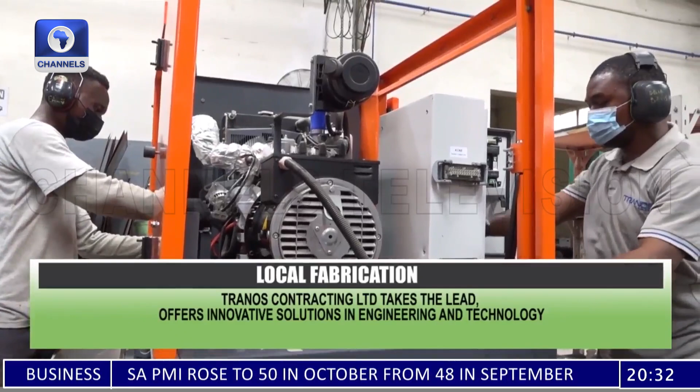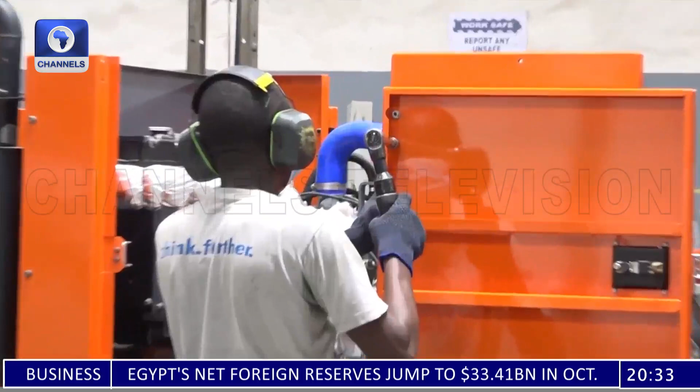Tranos is an engineering and manufacturing leader, adding value to lives through innovative solutions. Customer satisfaction is a key factor of the company's quality management system. From the deployment of high-precision CNC machines and the engagement of competent personnel to the institution of standard error-proof processes, Tranos guarantees the quality of its products and services with a quality management system certified to meet the requirements of the ISO 9001-2015 standard. Officer of Tranos takes our team down memory lane as he explains how the company started.

Tranos, we started about 14 years ago, and the whole idea of Tranos from the beginning was to try and set up an organization where people can come together and be able to provide value for customers. So the overriding idea was to be able to provide value to customers. Looking at staff strength, I think we probably started with 3 people, including myself, of course. So we had a small office then in VI. We started by trying to do things in terms of project management and some procurement that we're doing for oil and gas back then.

Now, we wanted to provide value. So what has driven us across time to date has been trying to find out where can we provide value? What value can we provide for customers? So by asking and answering that question, we've come up with ways, we've learned a lot of things, driven by knowledge, to invest in people, invest in equipment, invest in processes that can help us provide value. So that basically covers what has brought us to where we are today.

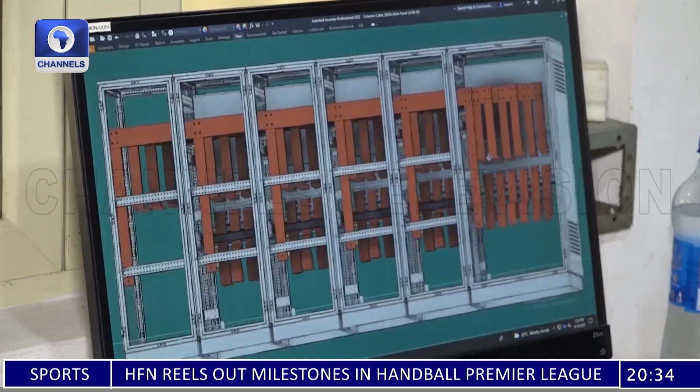In terms of staff strength, I think as of today we're about 170 people, because we do have, at times we go as up to 200, a little over 200, when we have installation jobs or repair to do for customers on site. So we are an engineering and manufacturing company.

And what that means is that we design things and we manufacture those things for customers. Those things will revolve around enclosures for various applications, both mechanical and electrical applications, power distribution equipment, that's electrical panels, electrical control panels, protection panels of various types. We make gaskets mainly for oil and gas and petrochemical applications. We make cable trays and ladders. We make warehouse racks for storages.

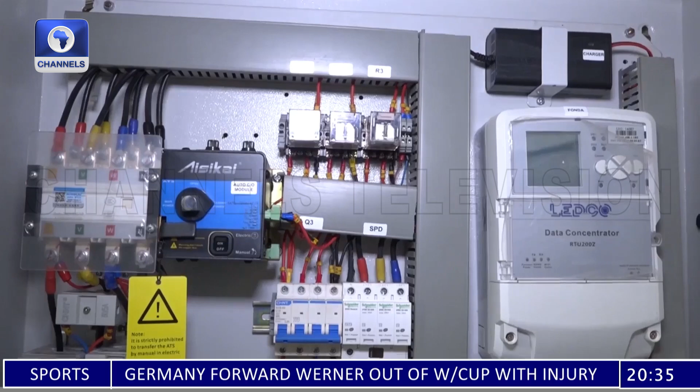Now, all our products are based on knowledge, meaning that you study what the customer needs, you study where the pain point is for the customer, and then you design a product to solve that problem. The drive was to solve problems. And when you're trying to solve problems in a sustainable manner, meaning that you want to be able to do this for years to come, you need to build a system. That system will involve people, it will involve processes, and it will involve a lot of knowledge.

So the drive was basically to provide value, and that drives everything we do. We want to provide value. That's the first thing that comes into our minds when we're trying to deal with things, when we are speaking to customers or when we're trying to respond to customers. Because someone walks in and says, oh, can you do this for me?

The thing he's trying to tell you is that I have a pain. So what we need to do is to find that pain and solve the problem. And that's basically it for us.

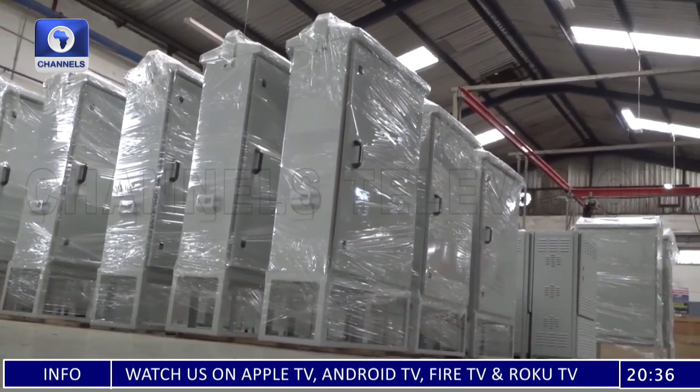It's been quite good. In fact, up until a few years ago, we never really used to do any marketing or sales. Practically all our sales were from word of mouth and referrals. And that shows you how customers view what we've done for them. So basically, you do something for one person, he speaks to another person about it. And in fact, we've had people come to us with problems that we hadn't solved for anyone else before.

And that's actually how our range of products have grown. We've grown on the basis of identifying pain points for customers, because someone comes and says, oh, I need a certain kind of enclosure. When you build it for him, you begin to realize that okay, there are many others like him who also need that solution. So that's how we've grown.

So looking at feedback from customers, they've been mostly positive. Of course, you have customers, some are not happy with price, some might have issues in the course of delivering to them, but at the end of the day, our focus is to make sure that the customer is satisfied fully when we are done with delivering our products or services. So we are very focused on that, because at the end of the day, we are here for the customers. So we try as much as possible to exceed the expectation of our customers, and based on that, we've been able to grow from there.

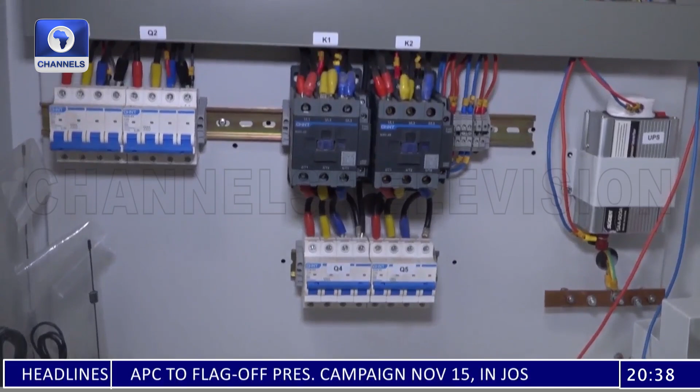So our products are first and foremost geared towards delivering power to customers. So we make various types of electrical panels and switch gear for customers, and that basically helps take power to where it's needed. We also manufacture cable trays and ladders, which is also used for power distribution for routing cables.

In addition to that, we have a range of gas generators, which we now manufacture first for the telecoms market, and those generators are designed for remote applications. So we have specifically designed gas generators that can work remotely with minimal intervention, and they run on LPG. LPG is your cooking gas, so you basically are using the same gas you used to cook to power your equipment.

And if you look at all that, that's why I said when you asked, I talked about power. Now, our enclosures are also used a lot for power, so we have customers that use our enclosures for generators, for protection and sound attenuation on generators. We have customers that use our enclosures for other power distribution. So you have a customer that wants to build his own panel, so he comes to us to buy his own enclosures. We make enclosures for meter boxes as well. So you know the meter in your house, it has to be protected in a particular well-designed enclosure. We make that as well.

So you will see that about roughly 80% of our products are geared towards power. Our gaskets are also used in the oil and gas industry, which is energy basically. And we also have the racks. Now, racks are more industrial. It's for storage, so I'll say industrial and commercial. But you will see that a lot of our products are designed to help one way or the other in either generating power or distributing.

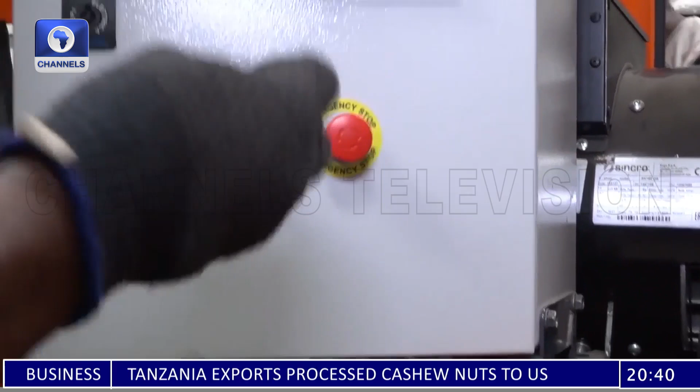The Nigerian power challenge is not a technology or a technical problem. It's a commercial problem. So it's similar to, years ago, we had NITEL, and there were issues with communicating. What changed wasn't a new technology really, per se. Yes, GSM was relatively new then, but that wasn't what changed. What changed was that the industry was commercialized such that it was able to attract enough investment to solve the problem. So similarly, in the power sector, what we have is there are no commercial incentives for a lot of investments to come in to change what we have.

So it's not really, if it was a technology issue, we can say, okay, we can come in. And yes, we are doing that in a way with the gas generators that we have, which easily replaces diesel generators and gives a better return on investment at the end of the day. However, it will not suffice for the whole range of demands that are available for power consumers. So bottom line, the Nigerian power problem is a commercial problem, not a technical one.

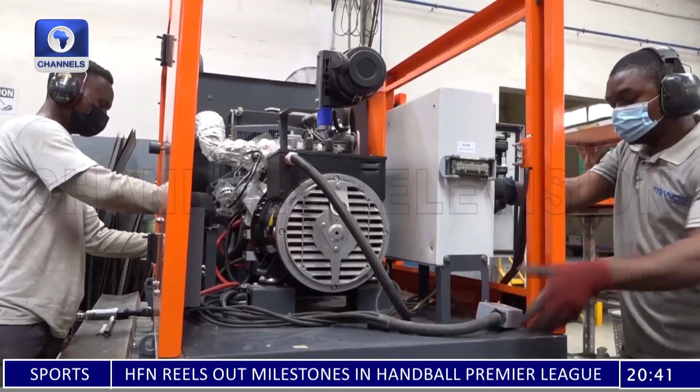From an initial staff strength of 14, Tranos now boasts of well over 100 workers, as the managing director speaks on the services provided by the company.

We don't work with short-term benefits in mind. In a lot of the things we do, we could have easily just gotten a partner or manufacturer somewhere, say we make warehouse racks, get a warehouse rack partner in Europe or Asia, and all we do is receive orders and import. That's an easy way of doing things, and you make some margin on it. It's business. But we decided that rather than do that, let's learn how to produce these things ourselves and even improve on what others are doing outside.

Looking at it from that perspective, I think that's what differentiates us from a lot of people. Depending on the market or product category, we compete differently. But one key thing we hold is that I don't just want to supply you this thing or solve your problem, I want to understand how you will use it. I want to understand how I can improve the product so you can have a better time using it.

So that clearly stands us out from everybody else, because we have that clear dedication. It's not attractive because it doesn't make money for you immediately. It's a long-term thing, because we believe that at the end of the day, that process will get us to provide better value for customers and also help us grow as an organization.

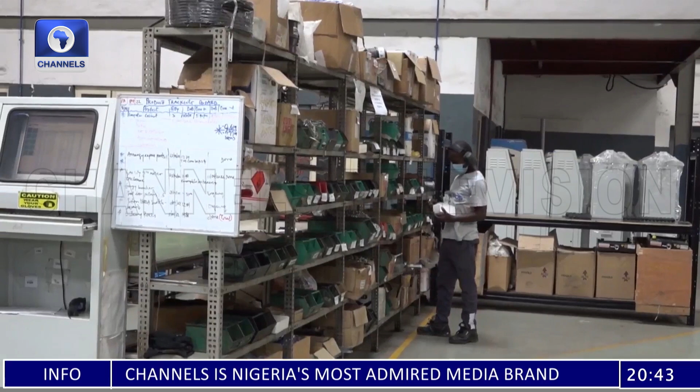Challenges in business, especially in an environment like Nigeria, are continuous. So I'm not going to say I've solved some of the problems, but I'll think of some of the lingering challenges we have. For me, the biggest challenge would be supply chain.

For a manufacturer, you are basically getting input materials, raw materials, and either converting them into some other stuff or incorporating them into an assembly. If you're a manufacturer, one small pin missing from the full bill of materials of what you are producing means you can't finish that production. In a country like Nigeria, where there's limited availability of support industries that can manufacture some of your own inputs, especially in our case, it means we have to bring a lot of things in.

The challenge is that importation and clearing of goods is a lot of pain. So I would think that's one of the major challenges we face. We try to do what we call a lean manufacturing process, and in lean manufacturing, there's another concept called just-in-time.

You go to a factory, say in a place like Japan, like one of our partners, Yanmar. They don't keep inventory for more than 4 days, meaning what I need to produce on Thursday arrives in my factory on Monday, so it doesn't stay in storage for more than 4 days. We can't even dream of that. They can do this because even if goods are coming into Japan from, say, Germany, they've planned it so it will arrive 4 days before.

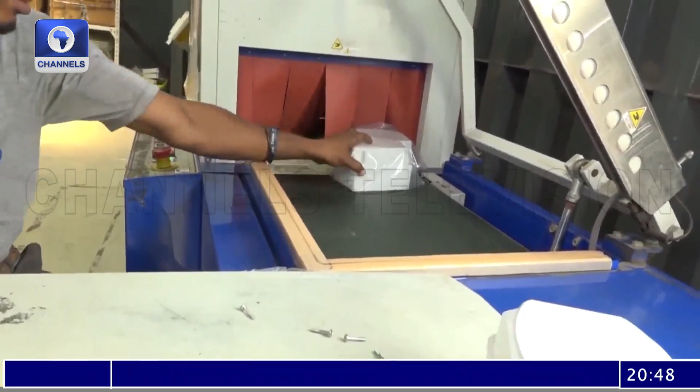The production manager explains the various stages of the process. This is a fabrication company, and this is where everything comes together. In here we have the mechanical assembly area and the generator assembly area. Over here they are assembling a TG1000 generator. They have 4 stages over there.

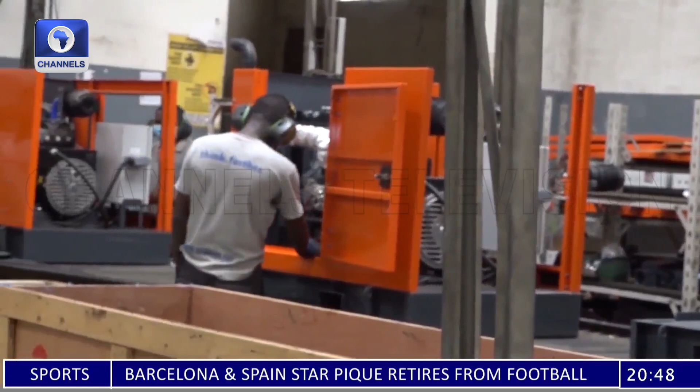Stage 1, stage 2, stage 3, stage 4, where they mount all the components. At the end of the day, we put in the oil and then the testing is done, which completes the process. On the other side is panel assembly.

They are fixing the frames and all the side walls to complete the panel. It's actually an electrical panel, but for this purpose, the client doesn't have the components here, so this is going to be installed on site. For what we're doing here, we're just putting the mechanical components together.

Over here to the front is finished products. We have all our finished products: feeder pillar, wall-mounted enclosures, some freestanding enclosures, and some panels that have electrical components in them. Over here we have our cable processing area.

This is where we process our bus bars, we also process our cables, and these components go into panels that we have to do electrical assembly for in here. So we have the capability to do electrical assembly in here, or we can also mount these components in the client's facility, depending on what the client wants.

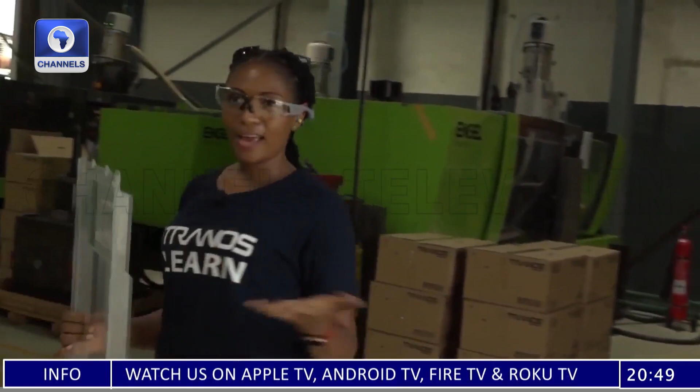The production manager takes our team to another factory where finished products are displayed. We're putting electrical components as well, so it has the enclosure itself, and it also has a stand for positioning the feeder pillar. We also have lugs here for lifting the feeder pillar.

Now this is a finished product, it's wrapped, it's already approved by quality, and this is ready for shipment. Over here, we have our electrical panel. This is a 40 amp panel, and it's ready.

Two senior staff of Tranos manufacturers explain their roles in the production process. We work with different departments, including the sales team, production, quality, and supply chain.

When we receive a request from the sales team in the form of a request for quotation, we prepare a bill of material in response to that request. We have an ERP system, the GSS ERP system, whereby we prepare this bill of material and send it to the sales team.

Aside from the bill of material, we equally provide manufacturing drawings for the production team. When we receive a request from the sales team, we convert that request into a 3D CAD model, something like this. We have different product lines.

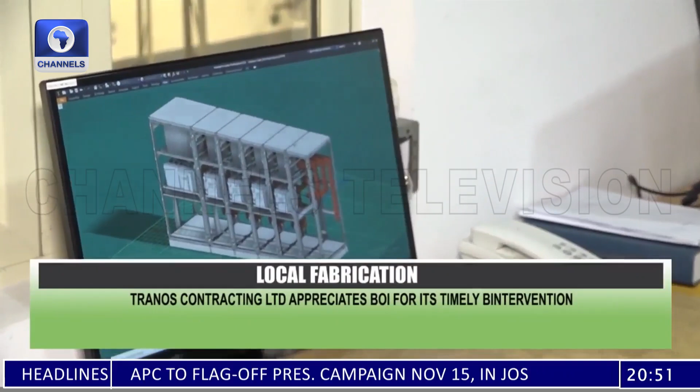This is one of our product lines, a low voltage switchgear that was modeled based on the client's request. We have an in-house electrical team that gives us a schematic and a component arrangement diagram, which we convert into a 3D model. From the 3D model, we provide different drawings for the production team to produce.

Aside from the switchgear, we equally have other models. We have a couple of software packages: Autodesk Inventor, Autodesk Design Suite, SolidWorks, and Solid Edge from Siemens. So we have other product lines.

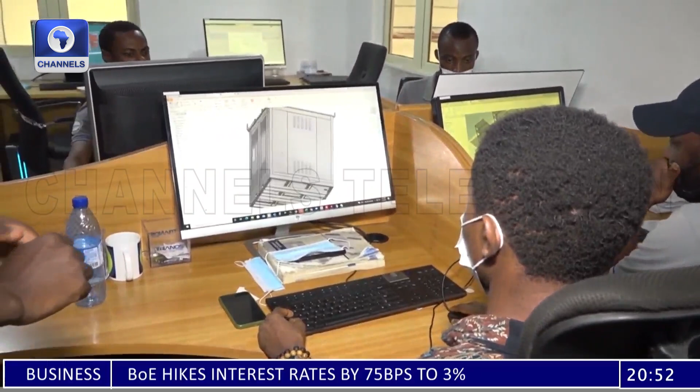This is a transformer enclosure done for one of our clients recently. The client brought their transformer in-house, and we took the necessary dimensions of the transformer. We did an analysis to check the structural integrity of the base, to ensure that it can sustain the weight of the transformer.

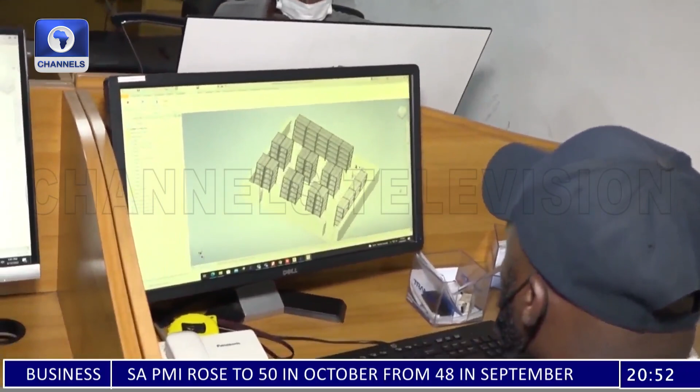This is one of our product lines, the warehouse rack that was done for a client recently. We got the layout of the client's workshop and optimized the layout to provide the suitable rack for their system. So what we do majorly is work with client requests and provide engineering solutions for manufacturing, to bring the product back to life.

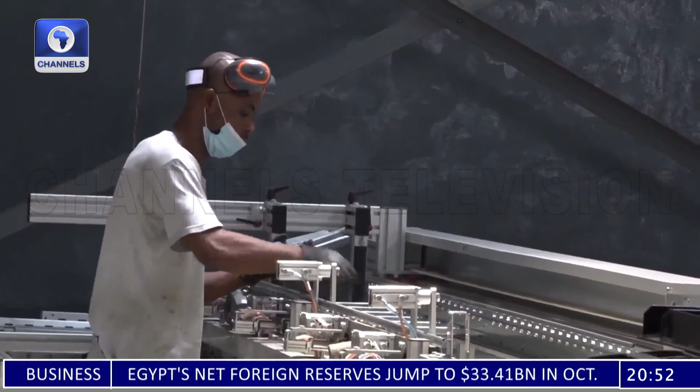The managing director speaks on their challenges, as he appreciates the Bank of Industry for its intervention. In terms of financing, BOI is open, and we've worked with them now for about 4 years or thereabout, maybe a little more than that.

Because of the professionalism that I have seen there, a lot of people still assume it's not possible to get introduced to BOI and be able to walk through the process to get your facility. But it does happen. So my advice to young entrepreneurs will be, don't believe what you hear. Try and go in and try for yourself, because if you have a genuine business case, I believe BOI can support you. I think it's a partnership, and they also understand that.

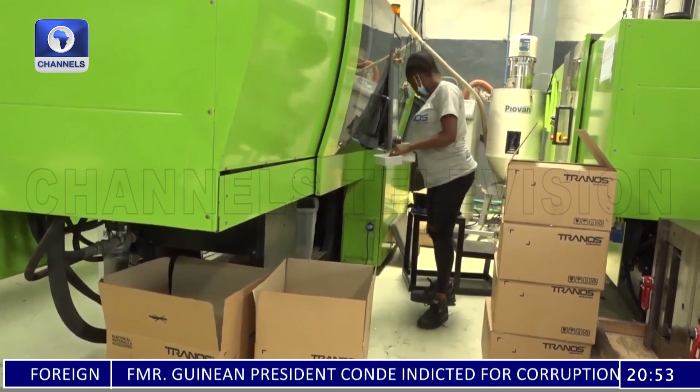So we are looking at the present, midterm, and future. I think this partnership we have with BOI will continue for a long time to come. We expect to still work with BOI, so let's continue to build this partnership for the long term.

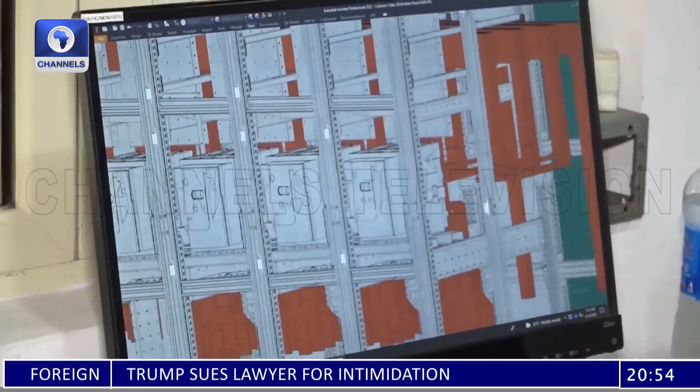Tranos is built on the dream of establishing an organization where individuals are given the opportunity to leverage their talents and abilities, joining these abilities with those of colleagues, teammates, and state-of-the-art technology to provide world-class products and services. They are focused on bringing the best out of their workforce, individuals and businesses, through logical and creative thinking using state-of-the-art technology, which is why the company prides itself as one that thinks further.